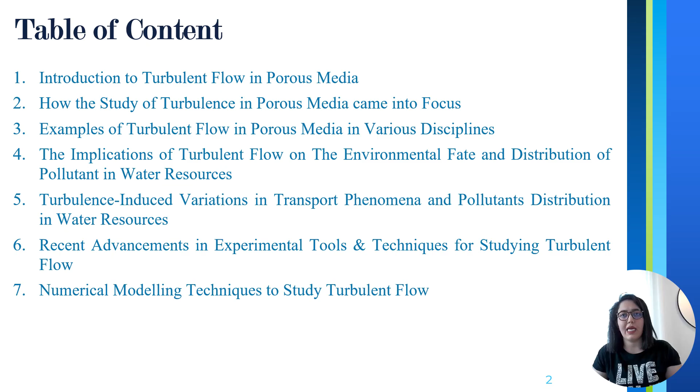When we are talking about turbulent flow in porous media, the nature of this fluid motion is chaotic. Turbulent flow itself is a type of fluid flow where the velocity field is highly irregular and unpredictable. Unlike laminar flow, where fluid moves in smooth, orderly layers, turbulent flow in porous media is often characterized by the formation of eddies and vortices of various sizes, which are often associated with high Reynolds numbers and inhomogeneous flow at stagnation zones. Turbulent flow causes intense chaotic spatiotemporal fluctuations in the flow field.

The critical Reynolds number at which turbulence begins can vary depending on the porous geometry and boundary conditions. Abrupt changes in geometry can result in flow separation and formation of recirculation zones, which indeed stem from the competition between surface forces, or more accurately viscous forces in the vicinity of solid boundaries, and the inertial forces in flow

with relatively high velocity. The study of turbulent flow in porous materials has been a topic of extensive research and debate. The current consensus is that occurrence of turbulent flow in porous media is even more common and beneficial in some applications than previously thought.

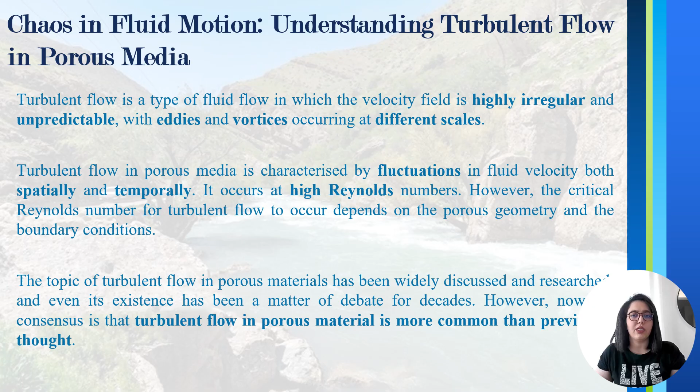Here in this slide, we will explore the significant learning points that have shaped our understanding of turbulent flow in porous media today. This journey through the history of research aims to highlight the contribution of several key researchers and their groundbreaking works. Let's begin with Forchheimer's contribution in 1901, when he first reported deviations of flow behavior from the conventional Darcy's law at high enough flow rates. This was a crucial step in recognizing the complexity of flow beyond the laminar regime.

Later in 1933, Fancher and Lewis introduced analogies between the flow in porous media and pipe flow. Next, in 1945, we have Rose, who identified an inertial transition flow regime between the laminar flow and the fully turbulent flow in porous media, emphasizing that transition from laminar flow to turbulent flow is not abrupt. Swift's research in 1962 was another approval of the opinion that deviations from the linear pressure-velocity relationship in porous media could be attributed to the presence of turbulence.

Bear further expanded on these ideas in 1972 by pointing out the existence of three distinct flow regimes. According to his discussion, as the flow rate increases, there are actually three different flow regimes. First, we have laminar flow, where Darcy's law is enough to describe it. Then we have transitional inertial flow, where the flow behavior would be nonlinear laminar. And ultimately, fully turbulent flow will be formed. This classification provided a clearer framework for studying flow behavior in porous media.

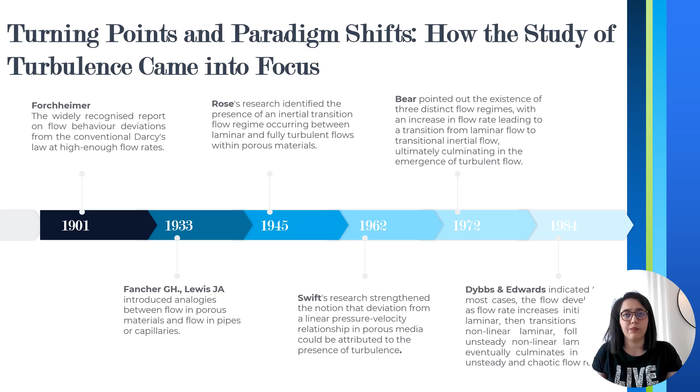Now, let's move on to some practical examples of turbulent flow within porous structures. These examples show the diverse applications and the occurrence of turbulence in completely different environments. The first application is in aquatic vegetation or underwater canopies.

Submerged aquatic vegetation, commonly found in river systems and aquatic ecosystems, forms a porous environment beneath the water's surface. These environments exhibit complex interactions between the river water and the porous structures formed by the vegetation, leading to unique flow patterns and turbulence characteristics. The turbulent flow within these underwater canopies plays a significant role in transporting nutrients, resuspending sediment, and also has effects on the aquatic ecosystems.

We also have turbulent flow in heat exchangers. Turbulent flow is desirable in heat exchangers because it enhances heat transfer by increasing mixing, improving heat transfer coefficients, reducing boundary layer thickness, and preventing fouling. Indeed, designing a heat exchanger to achieve and maintain turbulent flow is essential to improve heat transfer efficiency.

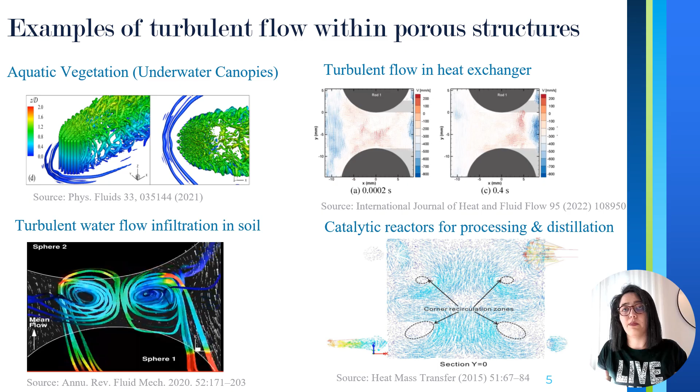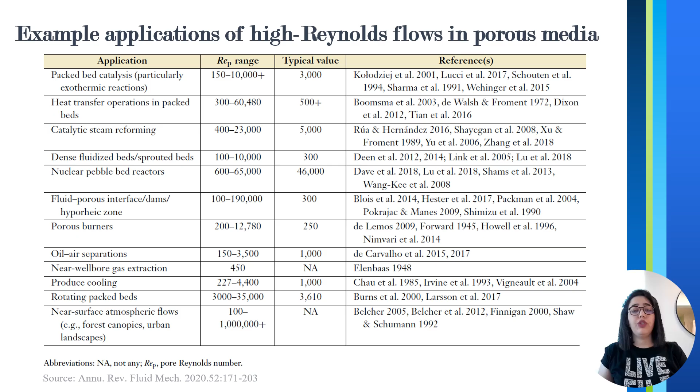In this slide, we have a table from an outstanding review paper published in 2020 by Wood et al. Here you can find a range of applications for high Reynolds flow in porous media with some references for each of them. In the context of the REMEDI project, we have focused on the application of turbulent flow in porous media with implications for water flow through river sediments, water remediation, and contaminant recovery.

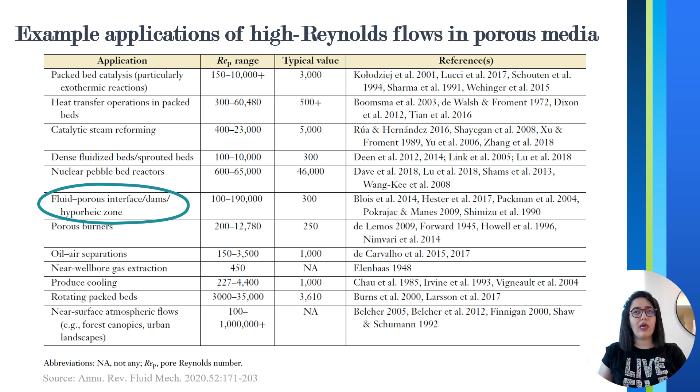These examples indicate the widespread occurrence and importance of turbulent flow in porous structures. Understanding and controlling turbulence in these applications can lead to significant advancements in efficiency, performance, and environmental management. In this slide, I would like to focus a bit on the environmental implications of turbulent flow on the fate and distribution of contaminants in water resources.

Turbulent flow plays a crucial role in the environmental fate and distribution of pollutants in water resources and stream sediment, particularly in river systems. It has significant impact on how contaminants are transported and deposited in stream sediments, making it essential for us to understand its mechanisms and effects. In river systems, turbulent flow affects various transport mechanisms, including mass transfer, momentum transfer, and energy transfer. These processes are critical in determining how pollutants move through porous media and interact with the surrounding environment.

One of the key areas where turbulence plays a vital role is in the interaction between the water flow and riverbed sediments. This interaction is complex and multifaceted. First, turbulent flow creates a dynamic boundary layer at the sediment-water interface, influencing the exchange of substances between these two phases. On the other hand, river sediments often form porous media, and turbulent flow can penetrate these structures, affecting the distribution and retention of pollutants within the sediment layers. Also, the turbulent motion of water can resuspend the sediments, potentially returning trapped contaminants back into the water column.

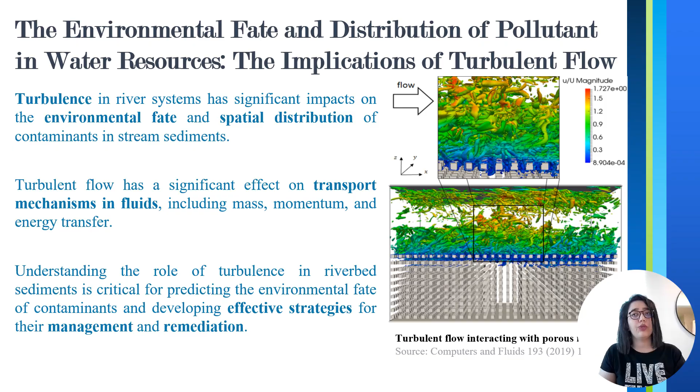In the following few slides, I will be discussing the critical role that turbulent flow plays in the transport of pollutants in water resources. Let's start with advection. Advection is the process by which contaminants are transported by the bulk motion of fluid. In high velocity flows, like when the fluid flows in a turbulent flow regime, advection is the dominant transport mechanism. This means that contaminants move primarily with the flow of the water, which can carry them over long distances relatively quickly. This process influences how contaminants can spread through large water bodies, such as rivers and lakes.

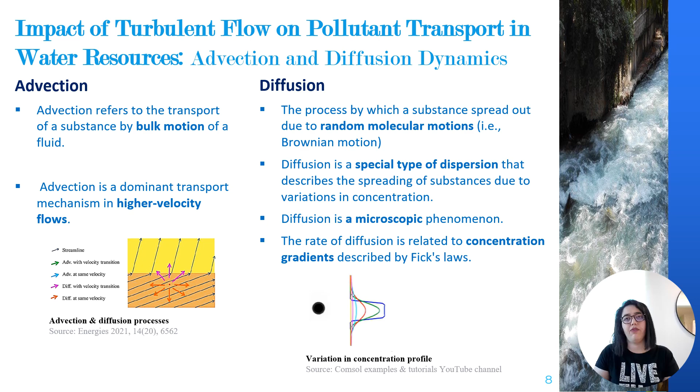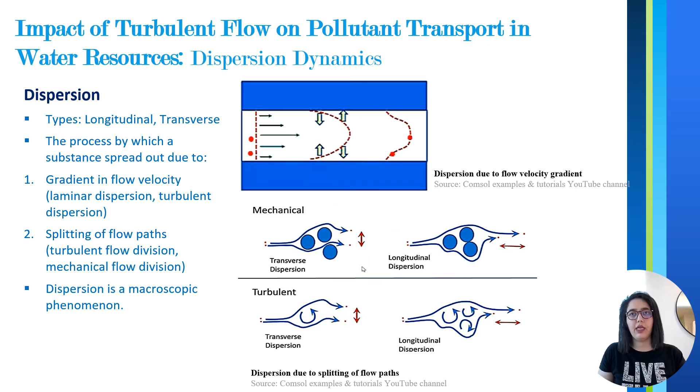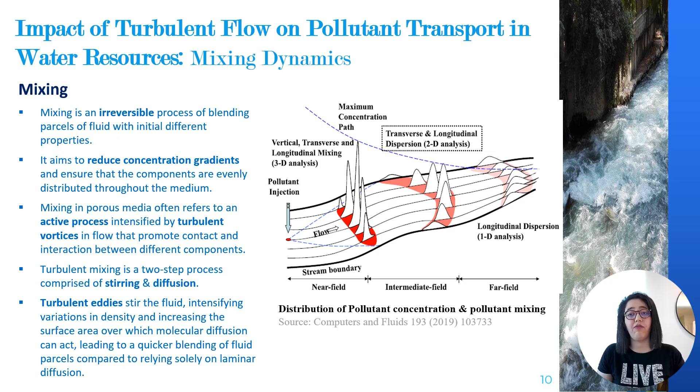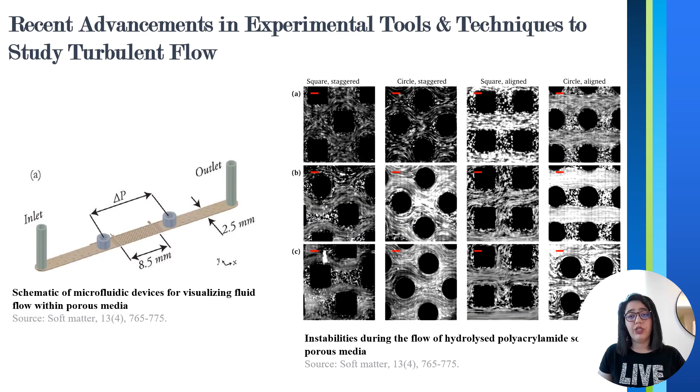Another advantage of using microchips is reproducibility. Microfabrication techniques ensure consistent device geometries, allowing for repeatable experiments. And eventually, microfluidic experiments require very small amounts of fluids and chemicals and a relatively quick testing procedure, making them cost-effective and environmentally friendly. By leveraging these advantages, researchers can systematically investigate flow instabilities, rheological behaviors, and multi-phase interactions at different scales and under conditions that were previously challenging to access.

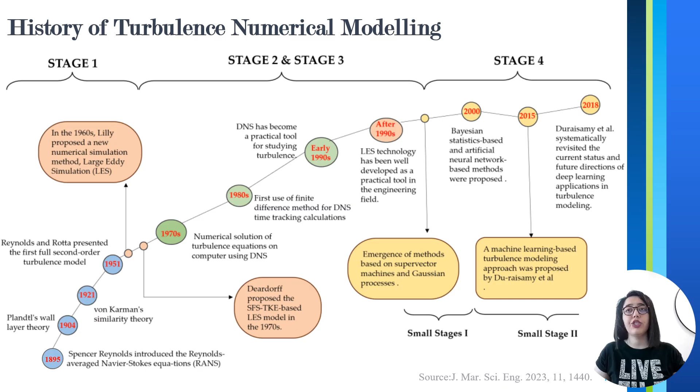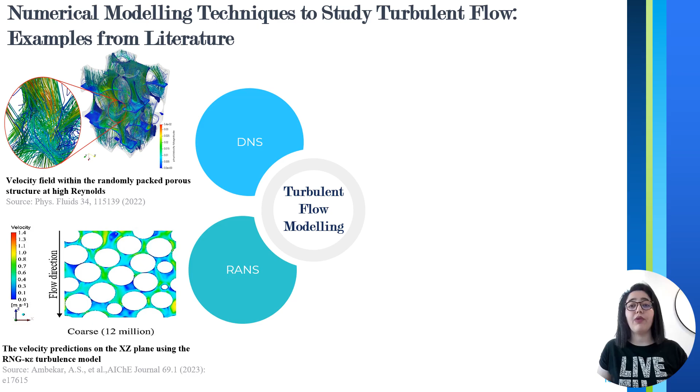In this last slide, you can find some examples from the literature that have numerically modeled the turbulent flow in porous media. The first work is velocity field determination within randomly packed and homogeneous porous structures with the same grain sizes at high Reynolds numbers, using the direct numerical simulation approach to investigate the dynamics of flow. The second one indicates the velocity predictions on the XZ plane using the RNG k-epsilon, or renormalization group k-epsilon, turbulence model, which is an advanced version of the standard k-epsilon model based on the Reynolds-averaged Navier-Stokes, or RANS, equations. In this work, the authors have investigated turbulence characteristics in a packed bed of 113 spherical particles by performing particle-resolved RANS simulations, also large eddy simulation, or LES, and direct numerical simulation.

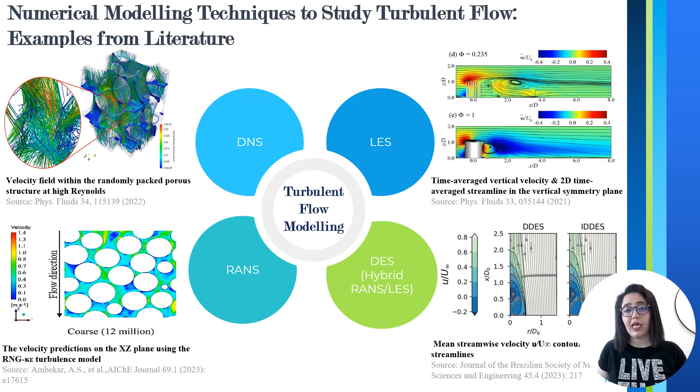In the third one, the authors have modeled the submerged canopy patches as a porous array, and what you can see here is the contours of time-averaged vertical velocity and two-dimensional time-averaged streamlines in the vertical symmetry plane at two different densities of array. This study leveraged the large eddy simulation approach. In the fourth study, the hybrid RANS-LES numerical approach was used. Regarding the hybrid approaches, two variants of detached eddy simulation, or DES, one delayed detached eddy simulation, DDES, and improved delayed detached eddy simulation, or IDDES, were studied. Here you can see mean streamwise velocity contours and streamlines for the results of both variants of the hybrid approach.

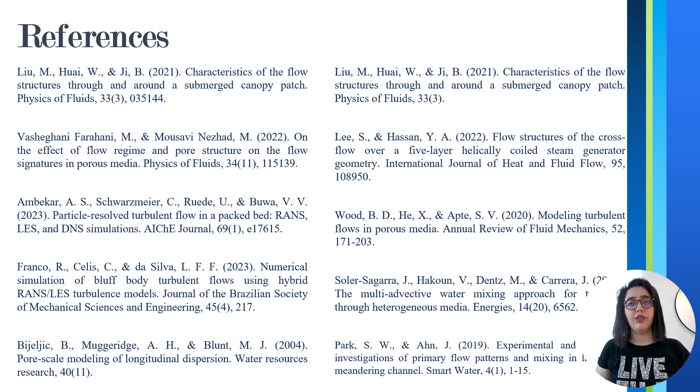Finally, in this slide, you can see some of the references that I've used to prepare this lecture, and also for each figure that has been adopted from literature, you can find the source of the image right beneath each image, and you can refer to them for further information if needed.